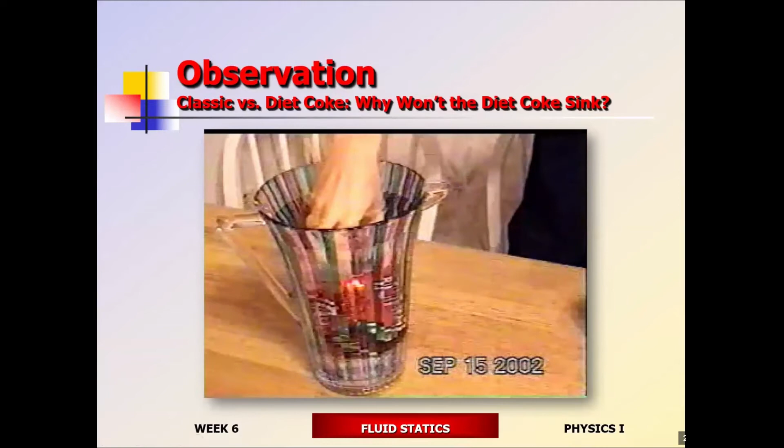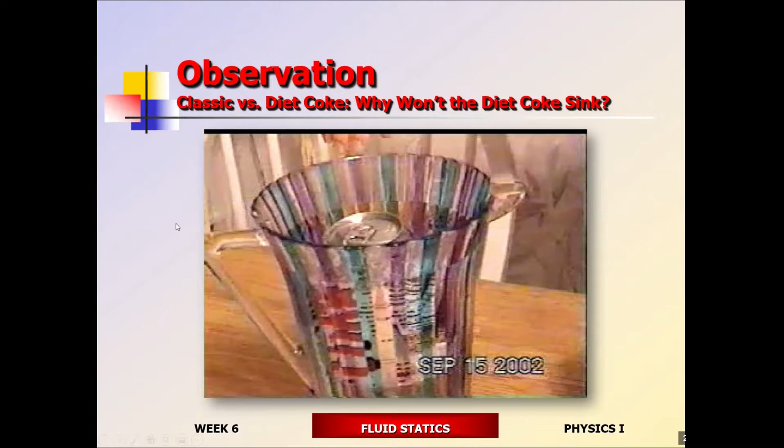Alright, one of the things we should be able to answer today is why the regular Coke, when placed in water, remains at the bottom, while Diet Coke floats to the surface. Both are 12 ounces, both have the same volume. So why does the Diet Coke float while the regular Coke sinks? Most of you said Diet Coke must be less dense. But if they have the same mass, same weight, and same volume, how could the Diet Coke be less dense? How does that even make sense?

Alright, so Pascal's principle is what we were just discussing.

A modern airliner is a device with 1 million parts that pushes fragile humans to the edge of space and the edge of the sound barrier. The failure of one or two of those parts at precisely the right moment, and the whole magnificent system falls to earth, often killing hundreds.

One of the co-pilots came rushing back several times, back and forth. You could look at the eyes of the stewardess and know we were in serious trouble. Just look at their eyes. Mary and Jim Call did what few people have done: they survived an airline disaster. Theirs came aboard one of the troubled early McDonnell Douglas DC-10s.

On a 1989 flight to Chicago, everything seemed perfectly routine until a loud bang rocked the plane. Soon the pilot made an announcement. After we did the big dive and heard the big boom, he told us that we lost the tail engine.

We really weren't aware that there was a big gaping hole in the back of the plane. He said he wasn't going to kid us, it was going to be rough, very rough. He said he wasn't going to kid us.

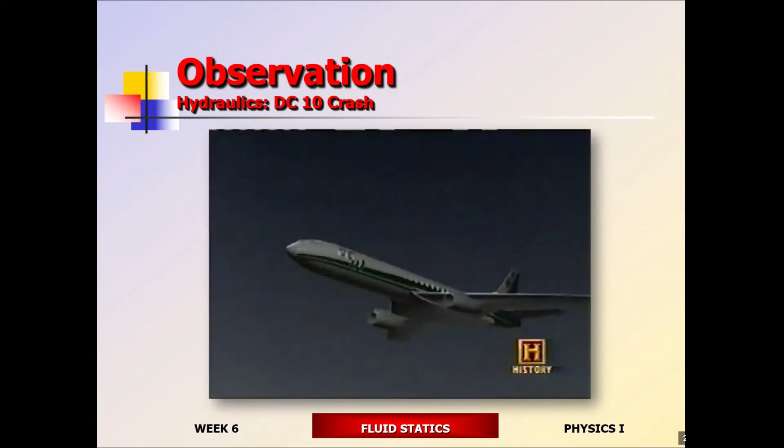What Jim and Mary didn't know was that the number 2 engine in the tail had lost a fan disc. In an instant, the disintegrating fan's shrapnel punctured all 3 of the plane's redundant hydraulic lines, causing all the hydraulic fluid to leak out, and at the same time chopped off a piece of the tail.

With no hydraulics, alright, so the hydraulics is leaking. No hydraulics means no brakes. No hydraulics means you're not going to be able to land. No hydraulics means no control. Without the hydraulics, you cannot control any of the surfaces of the airplane, and they had no control of the aircraft.

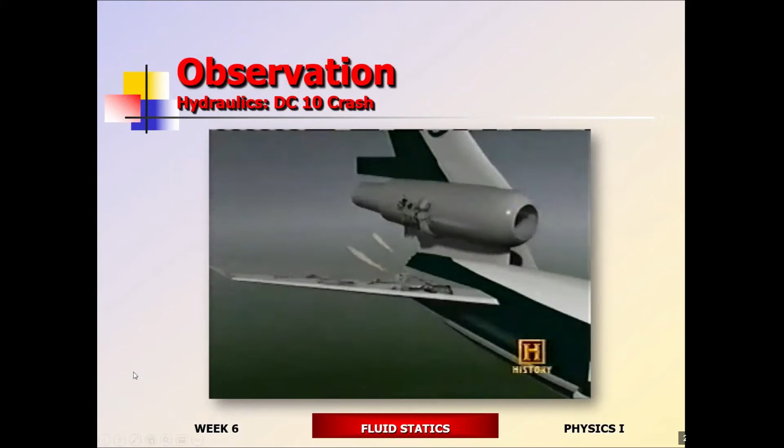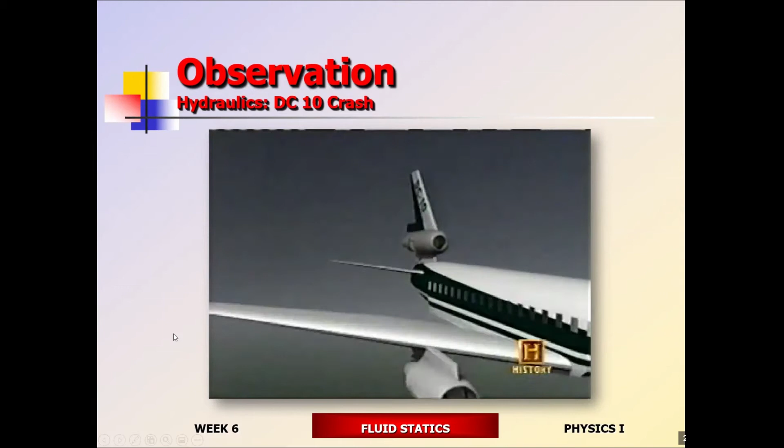Other aircraft use a 4th separate line in case of accidents like this. At least one passenger knew exactly what was happening—he built commercial airliners for a living. I recognized some of the noises the aircraft was making. The hydraulic systems were sucking air. I just thought, we're dead.

No hydraulics, no control—that's horrible, guys. The last thing to be on an airplane like this is to be an engineer or a physicist, because you know exactly what's going on. Under these circumstances, ignorance is bliss.

No wing surfaces, no brakes, there's no way to control this airplane, no nothing. For over 40 unforgettable minutes, this DC-10 carrying Bill Mackin and the Calls hurtled through the sky. It almost turned over at least 3 times. It's gliding—it's a glider. Passengers watched in horror as the crew dumped excess fuel in preparation for a crash.

Surprisingly, there was little panic on board. Some crying, some people prayed. No, there wasn't hysterics—there was some silent sobbing, people saying the Lord's Prayer, but not the mass hysteria you would expect. There was not hysteria at all. People were very, very calm, looking at each other.

A TV crew was standing by. Through an incredible piece of flying by the captain, the huge wide body, controlled only by the 2 outboard engines, miraculously made it to the Sioux City airport. It came to earth only yards short of the runway.

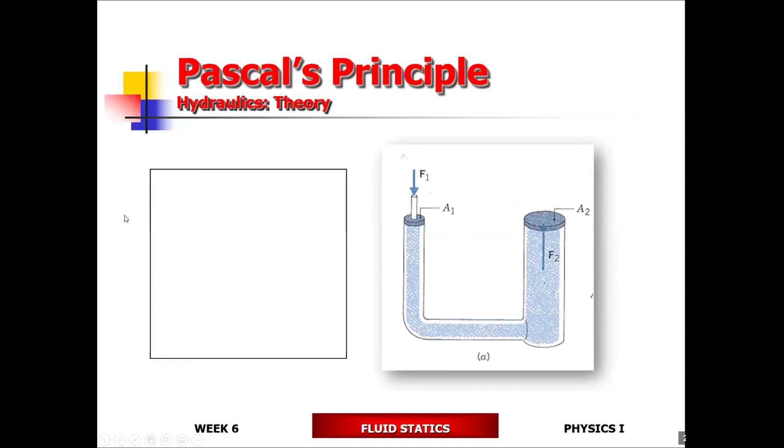So, hydraulics. How does the magic of hydraulics work? Guys, hydraulics is a force multiplier, and the way it works is based upon something called Pascal's principle.

According to Pascal's principle, if you apply a little bit of force here on the left hand side, notice this is the amount of force being applied to this opening. This is the area you're looking at, the piston. The output force is going to be magnified. So the input force is F1, F2 is the output force. The output force is going to be larger than the input force.

By how much? I want you guys to do a comparison. Take a look at area number 1, and the size of area number 2. If the second area is 2 times larger than the first one, the force is going to be 2 times larger. If 3 times larger, force is 3 times larger. If 10 times larger, force is 10 times larger. If 100 times larger, force is 100 times larger.

So how does the magic work? According to Pascal's principle, when you apply a little bit of force on the left hand side, you change the pressure within the fluid. This change in pressure inside the fluid gets transferred and transmitted all throughout the fluid undiminished. This is known as Pascal's principle: any change in pressure inside the fluid gets transmitted all throughout the fluid undiminished.

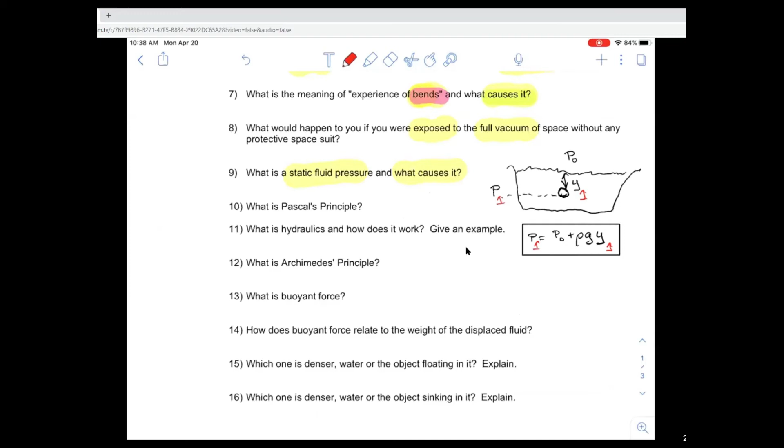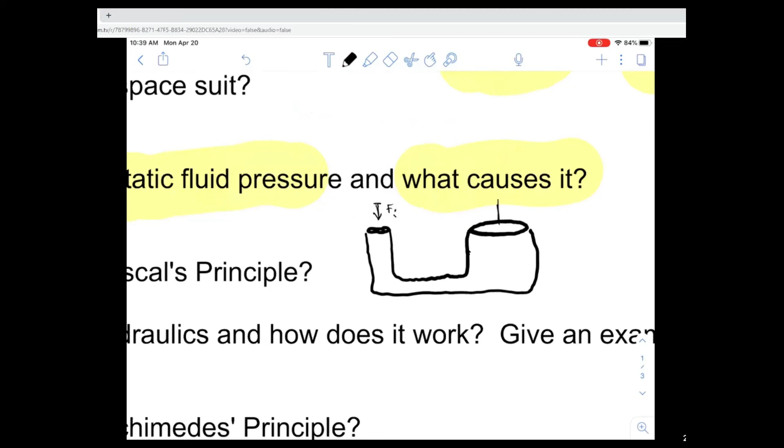Let's have an input piston here, and an output piston located right here. So we've got the input force, and we'll have the output force located right here. Input area, so we'll have the output area. So what do we know?

Which area is going to experience higher pressure, this region or this region? Which one experiences more pressure, PI or PO? What do you guys think? It's the same. It has got to be the same, right? Because the fluid pressure only depends on the depth, so PI and PO will be the same.

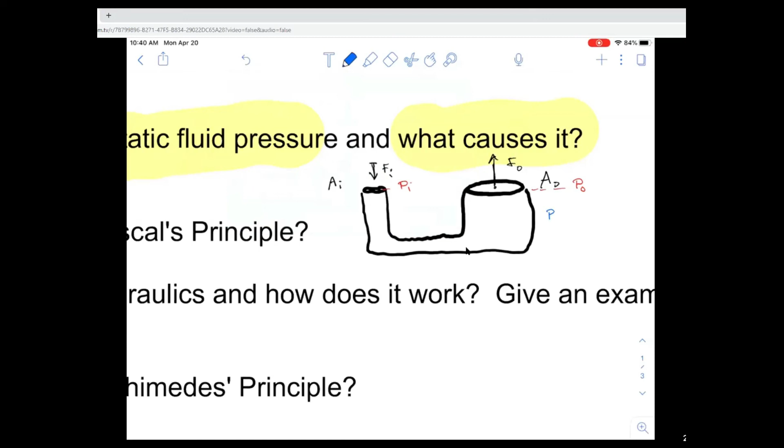Given the fact that the pressure is going to be the same, the pressure is constant. In this case, this is constant. What happens? Force divided by area. What happens when you increase the size of the area? The force is going to increase. That's it. So pressures are the same, PI is the same as PO.

Because the pressure only depends on the depth. If you increase the area, and here you're increasing the area, the force is also going to increase proportionally with the area. If you want to make the output force 100 times larger, the area needs to be 100 times bigger compared to the input area. So this is known as Pascal's principle.

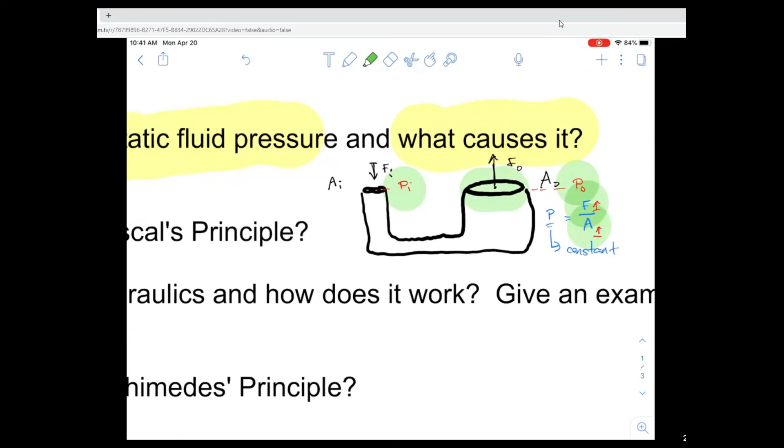So what do we put down as the term for Pascal's principle? Joseph, repeat. What are we going to put for the definition of Pascal's principle? The definition of Pascal's principle is: any change in pressure is going to get transmitted all throughout the fluid undiminished.

For example, if this is your car's brake system, you apply a little bit of force on the brake pedal, which increases the pressure inside the fluid. That increase in pressure gets transmitted throughout the brake fluid undiminished, all the way up to the brake mechanism. That's known as Pascal's principle.

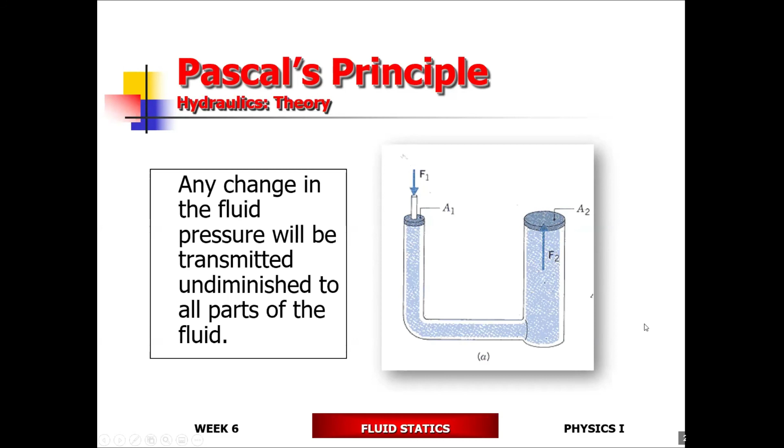The pressures will be identical at identical heights, so the force depends on the area of the output piston. If the area of the output piston is bigger than the area of the input piston, the force is going to be larger. So that's the definition. By using Pascal's principle, you can lift a car up by applying a very little amount of force.